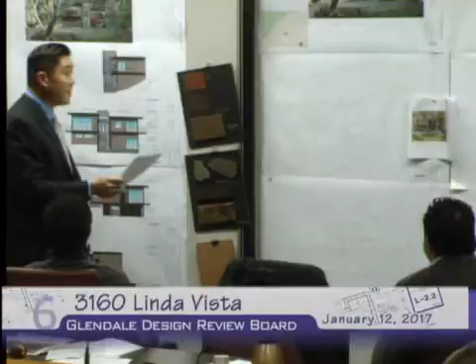There are 11 protected trees. Nine of them are coast live oaks, 2 are sycamores. 0 trees are being removed as part of this project. And once again, there is a blue line stream that's protected that goes down right down the middle of the lot.

Per our Chapter 16, there's supposed to be a 30-foot buffer from the center line of the blue line stream, which they're complying with. In 2011, there was a single-family home that sustained major damage by fire. The existing home had a 2-story profile, and with the packets for the site photos, it's on the front cover, so you can see it's very similar to what they're proposing here, but we'll get into the detail of the design. The exhibit of the photograph of the previous home was on the photographs of the site.

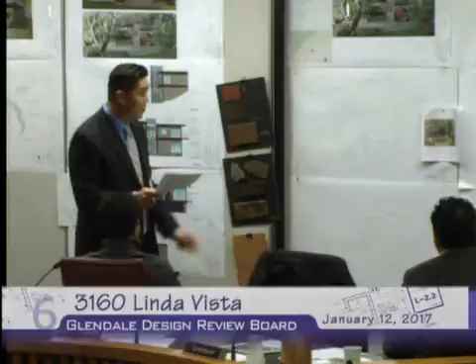Remnants on the property from the previous home include a flat building pad, a stone chimney that's still standing, and a landscape retaining wall along the southern property line that partially goes over into the adjacent property, which I'll get into the conditions of approval and what they're recommending as part of zoning compliance. They're also maintaining an asphalt driveway that takes access from Linda Vista Road and crosses an existing wood bridge.

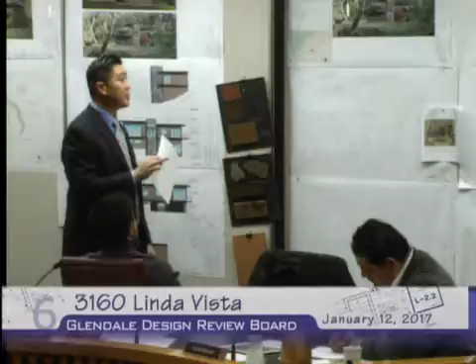Before this application, in October 2016 the hearing officer approved a variance. We requested 2 deviations: one to maintain the 6-foot interior setback from the interior property line, which is where the setback is for the existing footing and the previous home, and also to maintain an existing driveway with a 21% slope, which requires today a maximum of 20.

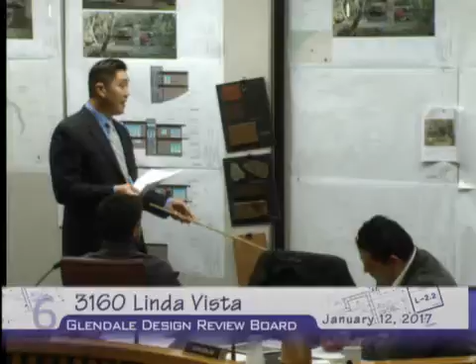Going back to the 6-foot interior setback, by code today for a new home it's 10 feet, so they were approved with a 6-foot setback.

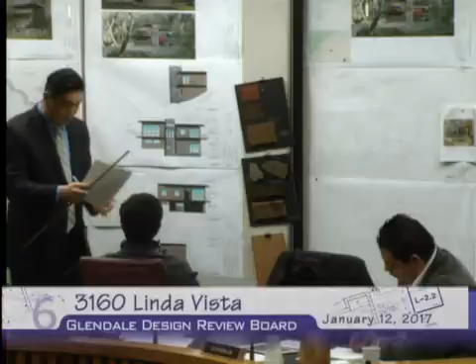Included with the hearing officer's variance approval was an initial study with a final mitigated negative declaration, which included mitigation measures for protection of the blue line stream, maintaining the 30-foot setback, and also including conditions by the certified arborist of record for construction methods to protect the 11 trees on site.

Going on to the design of the project, overall staff feel the project has done very well. Once again, it will be sited above the existing footings of the previous home. Essentially there will be almost no grading, but very minimal. The only thing they're going to be grading is to enlarge the footprint of the garage, which will still maintain outside the 30-foot buffer area, to have a compliant 20 by 20 interior garage.

It will have an extensive setback, approximately 76 feet from the street front setback from Linda Vista Road. Vehicular access will be maintained from Linda Vista via that existing asphalt driveway as well. Massing-wise, it will have a 2-story configuration, but it will be reduced as it's sited at lower portions of the lot as viewed from Linda Vista Road, and it will blend well with the neighborhood context, once again situated on this existing flat pad.

The new 2-story home will be broken into 3 separate volumes. The middle one is the center volume, which is clad in stone. It will include horizontal elements that help reduce massing, including the flat roof, which is broken into 2 different levels. It has a sheet metal band course that wraps around the building, metal cladded parapets, and horizontal lap siding, as you can see here on the material board they're providing.

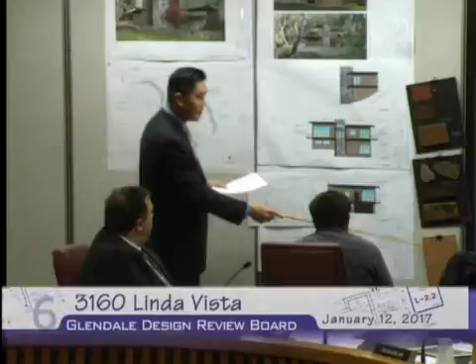It seems like they have different exposure heights, but we can talk about that later. Overall, the building forms and materials relate well with one another. The contemporary design of the building finishes blends well with the natural hillside. The architectural design elements include, once again, the horizontal siding.

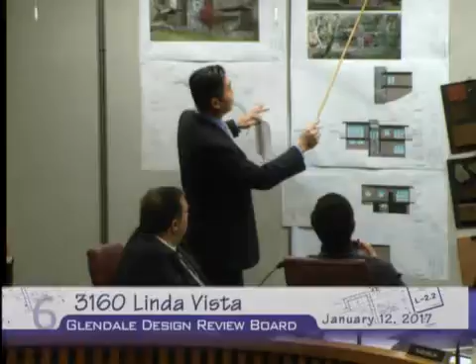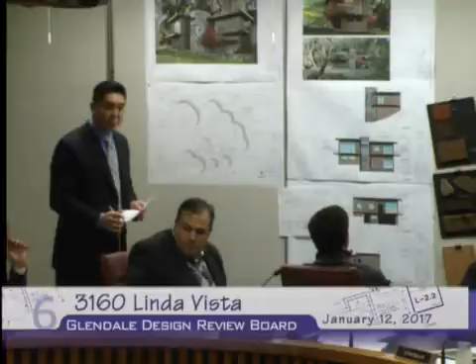In the report, we mentioned it was going to be recessed windows, but after getting clarification, there's a section drawing provided by the architect, who's here present, showing it's going to be a nail-on configuration. It will also have a surround trim that provides a transition piece, more pronounced on the 3D rendering than on the elevations, but it does provide that trim piece with a transition between materials. Staff still supports a nail-on window, not recessed as far as this design goes.

It also includes sheet metal band course, and they're going to reuse stone from the remnant chimney and reapply it as a base, and also in the center volume here as well.

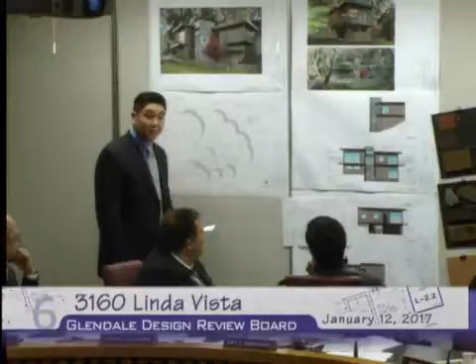Before I get into staff's recommendation and conditions, staff received two letters yesterday and today by email in support. One was from a neighbor, a Mrs. Jane, I forget her name, and also a letter of support from the president of the Chevy Chase Estates Homeowner Association, Mr. Brian Duran.

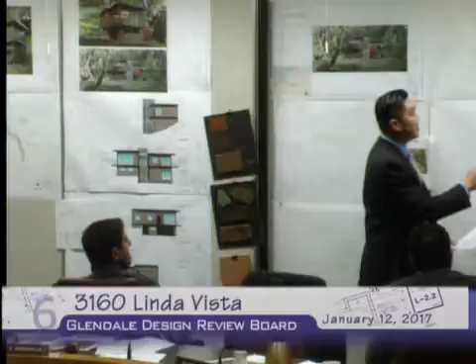Overall, staff recommends approval with conditions. First, the existing 6-foot-high block wall, or landscape retaining wall, on the south property line needs to comply with today's code. Walls within 5 feet of the interior property line have a maximum height of 5 feet. As the section drawing shows, it changes in height from 5 feet 9, almost 6 feet, down to 5'3". Anything within 5 feet needs to comply with the zoning code, and the landscape wall that encroaches into the adjacent property needs to be moved away from their property.

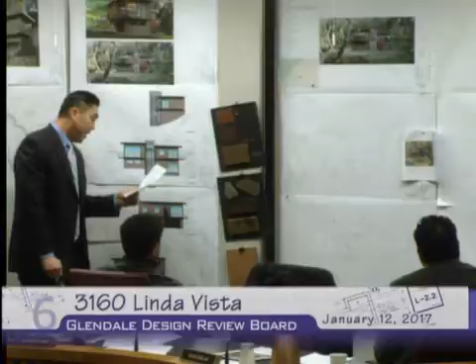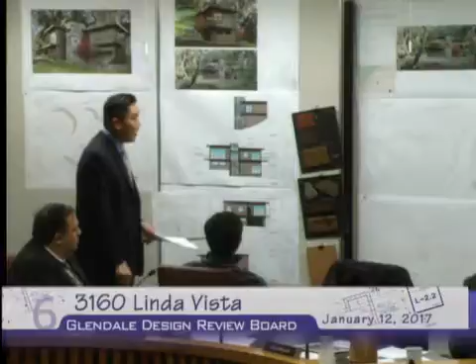The second condition concerns the proposed cedar plank sidings. If building and safety requires an alternate material due to it being a high fire hazard area, we want to give some flexibility to use a cementitious fiberboard, as they're proposing here, like a James Hardie plank siding. I had a brief discussion with building and safety—they said it depends on how they treat this type of cedar plank material, and I wasn't sure how they'd proceed, so we wanted to give flexibility and get comments from the board.

That concludes my presentation. If you have any questions, I'll definitely be available to answer.

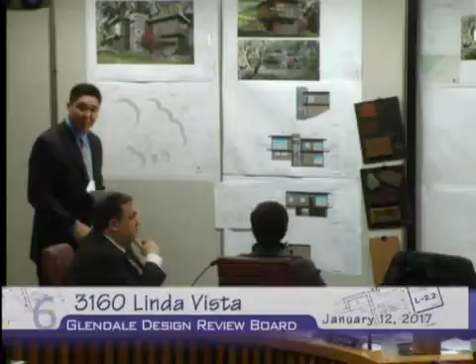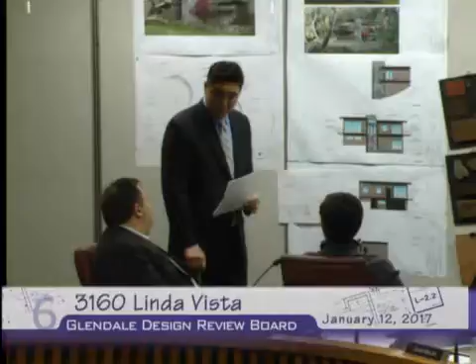So the suggestion or condition by staff is that we ask them to reduce the 5'9" to 6-foot-tall retaining wall by a foot to get into compliance. By zoning code, retaining walls within 5 feet of an interior property line have a maximum height of 5 feet. So the recommendation is that we ask them to shave it off? Yes.

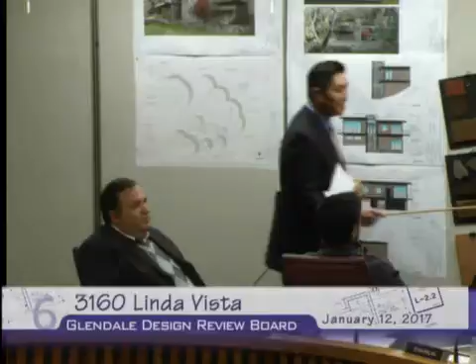And part of it, they need to move the tail end of it—the tail end that's encroaching into the adjacent property, just by a couple of feet. But that's a zoning issue, it's not a DRB issue. Right, we're just pointing it out right now. Okay.

You answered one of my questions with the higher fire zone and the use of the cedar siding. The second is the reuse of the existing stone from the existing chimneys. There's quite a bit of stone veneer here. Is there enough on site to do all the stonework?

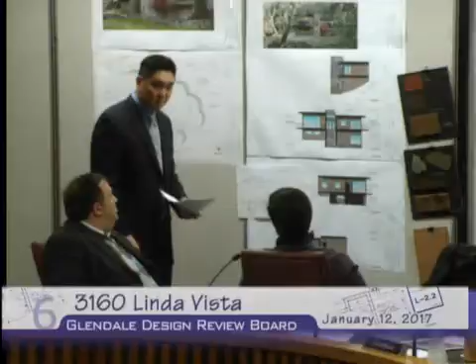That's a very good question. Maybe perhaps the architect can help. I'm not too sure if there are any materials that can match it, but that's definitely a really good question.

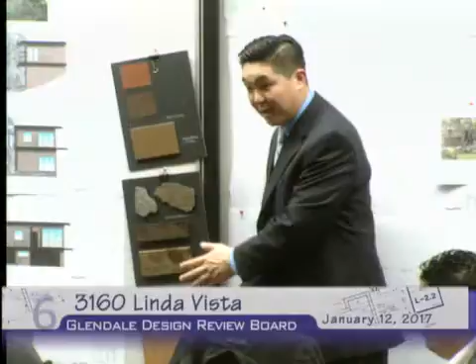From my understanding, this was just brought today, and I thought maybe we'd get some clarification since the applicant and the homeowner brought it in, and I thought this might have been a siding material, which it seems like it might be, but perhaps we can just ask to figure out what their preference is, and then figure out what their intent is, because I can definitely see there's a bigger exposure, and I can be totally wrong if this is a siding material or not, but just in case we have clarification questions or something like that, we'll ask the architect.

Okay, thank you. If you would, Mr. Peters, come up. Sure, I'll actually defer to Nick because he's the one that's chosen. We can't be having cross communication, okay, so one of you guys come up. Your name for the record? Nicholas Kamori. Okay, thank you.

My experience has been in the R1R fire zones. Fire department typically asks for non-combustible building material to wrap the building, fire retardant. So it either has to be 2x cedar or some sort of material with a nominal thickness. There's a website that I think the State Fire Marshal has, and it dictates all the materials that are available that can be used in the high fire zone. But at the same time, if the fire rating is not met, then additional fire treatment or other types of construction will have to happen, like exterior drywall or something. So a lot of that, but at the same time, you have quite a bit of choices here.

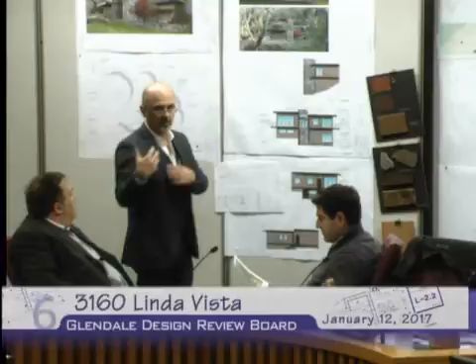I think I'm fine with keeping certain things standard, but if the biggest features that you were creating — my consideration, my comment would be to try to see if we can introduce some of the older details that were there and bring that in to utilize. And just the example I want to make is that instead of having this set — either if you want to, and based on the drawings, I don't know which is operable, which is a slider, which is a casement, which is the double, the pivot ones — I don't know which they are.

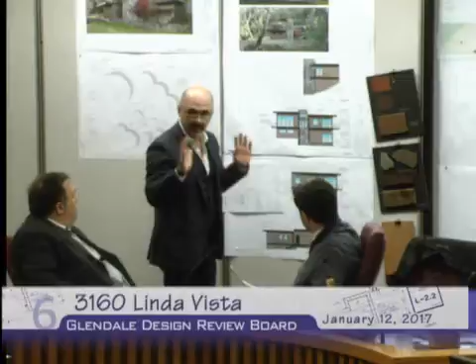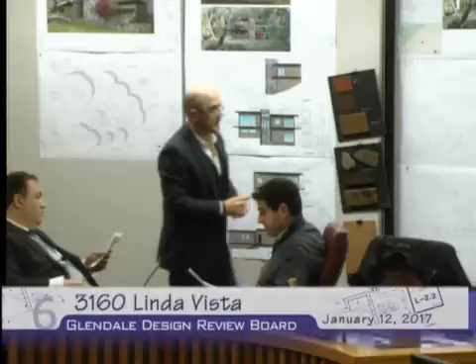But assuming that this is a stacking glass that stacks over, I would either have two options. One is that if this is stackable, maybe it stacks out in the middle and then have a post that goes all the way to the top so that you bring back what was there. You bring the full height window glass that was there, and essentially you create these vertical elements as you had it back then.

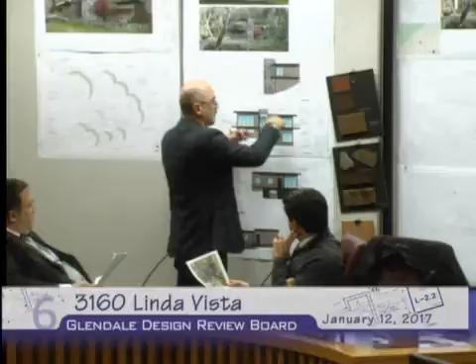At the same time, when you start looking at this, one of the interesting things about that older design was that the siding was vertical, not horizontal. And by creating this as horizontal and making these long gestures, but then at the same time you're putting these long windows, I think there's a conflict there. This is trying to be a vertical element, whereas all the windows are vertical, but then you're introducing these horizontal sidings. So that to me is again in conflict.

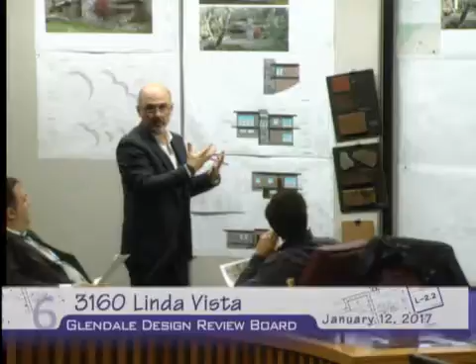So I think simplifying, leveling out some of these head heights, figuring out a focal section, a focal point as you're driving in — wow, this is what was there before, this is what we're proposing now. Maybe you don't need to put a post in or put these in as it was there, just raise this up, bring it all the way to the top.

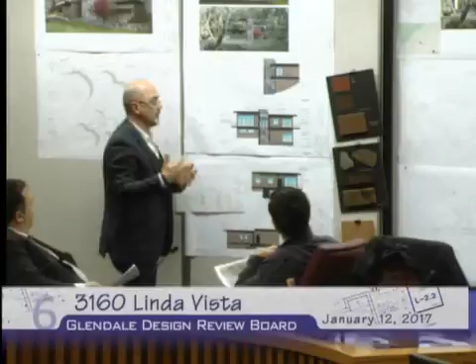I don't know what that's going to do, or if it's even going to be available. If you're going with the standard, maybe think about doing something different there. And then you have these two windows coming together in the corner — you may want to consider cutting this and introducing the same material so you see these two corners as one. I don't know how to explain it.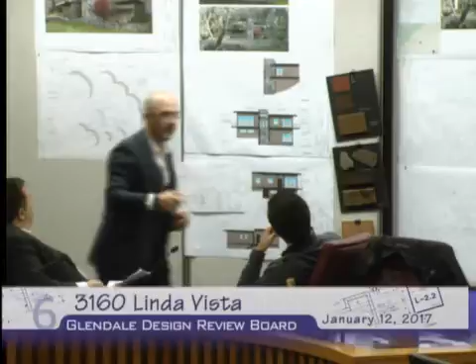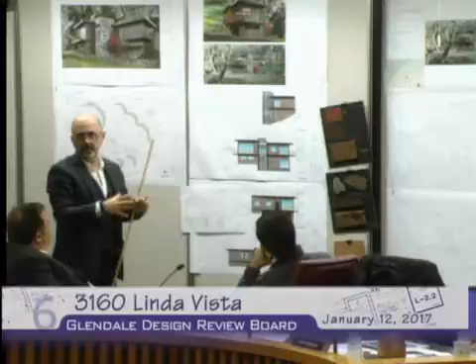Maybe if I can get the pointer — so for example, you have this large window here, but it's cut with this. What if this little section is cladded with the same material as the window? Then you'd see this whole thing as one, like a corner glass element. It takes away from these verticals, because as you come down it gets wider here, so it really doesn't make any difference.

I don't see this top and bottom tying together in an aesthetic way. Also, these windows placed here — I think the simple large gestures of the picture windows you've created, combined with these smaller windows, bring in this 80s, Michael Graves-ish kind of postmodern detail.

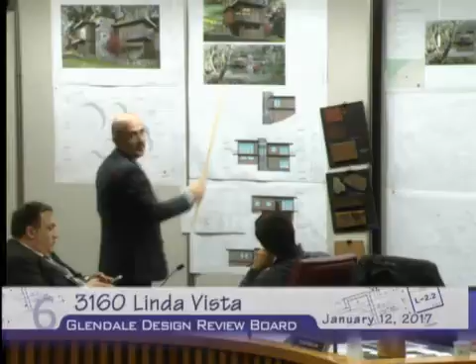So I think what I would do is look into maybe a rectangular shape, taking one of these shapes and making it more proportional, instead of all these windows and this punched opening. That would accentuate the verticality of the stone with a more proportioned window placement.

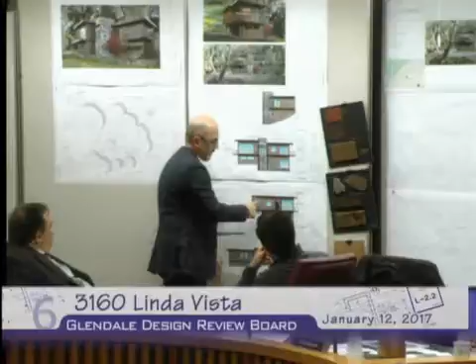Again, when you're done, these are either going to be there — I don't think you're going to have this big large window that opens up, because this thing needs to open and I don't think you can reach out that far to get the egress or fire egress. So you may end up having a divider in the middle, or some sort of slider, which will change the design itself.

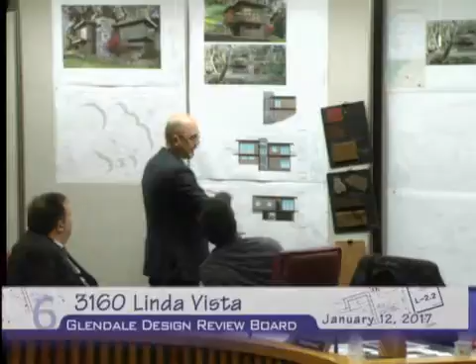Cleaning up some of these head heights, and going back to what was there, understanding what was important in the past design versus now, and putting all of this together, I think will really help define the project much better.

Thank you, Mr. Malakian.

I concur with some of Mr. Bellion's comments regarding the site orientation, your layout, and the ability to use the existing footprint. It's a beautiful part of Glendale — that entire Linda Vista is wonderful, and this is an unusual site within Chevy Chase Canyon in that it's somewhat flat and you have a buildable area, so you're utilizing it.

You're proposing a two-story building, and you haven't really heard any comments from this board, nor do you have any from me, about mass and scale. That's usually one of the biggest things we deal with when a two-story is proposed in a hillside area — it's too massive, too big, proportions aren't right, it doesn't fit into or nestle into the landscape.

Mr. Peters, you've done a good job working with the mass and scale of the house, and you're proposing a reasonably sized home — I think all of that is positive.

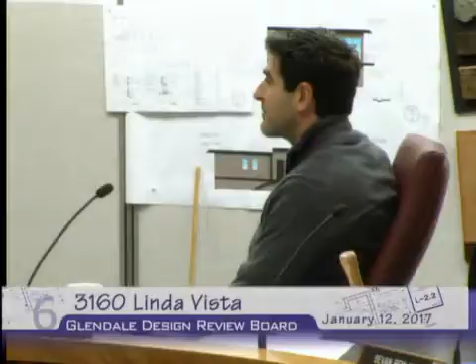And then is there a preference for the stain color? Because we have a few different ones up here. They're all similar, except the bottom one's a little more brown. Well, is there a preference? I don't really particularly have a preference between them.

So we'll go through these one by one. As far as the exterior material is concerned, there's overall support for picking one material. And if cementitious horizontal siding is... You had horizontal. Board Member Malikian was proposing that it be vertically oriented as the original design. Well, then let's simplify this condition for now. Okay, one exterior material.

And if not, based on the samples that were submitted, it's kind of architect's choice for the stain finish. So that takes care of the materials, and the architect's already gone on record saying there's no smooth stucco.

And so now we get to some of the conditions insofar as the windows. Let's start with the easy one as far as the exiting is concerned, right? So many different types of windows we could choose from, not a big list. Do we want to prescribe one, saying go with hung, et cetera? Is there a preference by anybody on the board?

I mean, just design-wise, I think it needs to work with the overall design. I don't think we have a choice. There's certain sizes that they have to meet. It needs to be a certain height from the floor, so it kind of dictates what it ends up being. But it's just a matter of how large of a window, if a section is openable, section is fixed. It just comes from, it's endless.

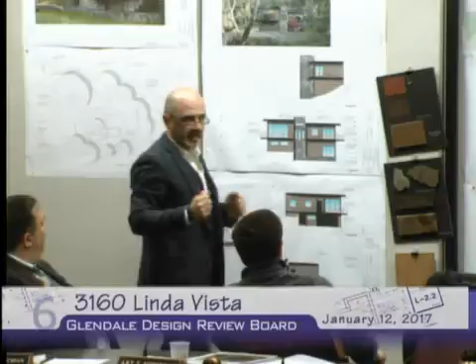And I like also Mr. Malikian mentioned the two corner windows, when they meet, they can meet each other, not separate. Just an idea, and then it's up to you guys. I'm more concentrating on the corner and trying to look at that and understand it. And obviously if we're not able to get these the way that pieces of glass are actually made, so the other option is that maybe we cut the siding here and introduce some vertical siding members, and then change some color there that gives this vertical element right on the corner, which I think is beautiful.

And somehow, these are just kind of thoughts. It doesn't have to be that the glass goes all the way to the top. It could be that whole section changes into something a little different, even metal right in the corner. The siding can change or something. I don't know, so our concerns are more specifically on the living room corner, working something that's more in line with a classical mid-century post and beam direction.

And it can cut off, and it can actually represent the beam there. It can be a kind of exposed beam that comes in at the corner and gives that post and beam kind of effect, that it cantilevers out. I mean, something that brings it out of these off-the-shelf side windows that are being placed in.

But that's just a thought, so if you guys are okay with it, we're fine. We can consider that and condition it. That's the way the board is leaning, but I think the general note and comment that you stated is that something can be proposed and the architect and staff can work on it. These are just thoughts, and I'm okay with that too, unless you guys aren't. It doesn't have to be that the window goes all the way up. We'll see what sort of language they're able to formulate based on that condition.